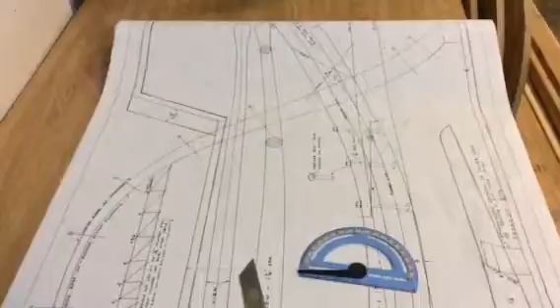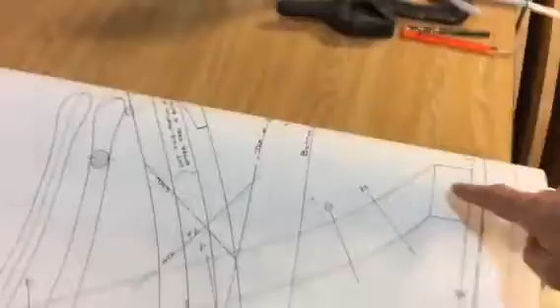Tonight I am working on trying to do this bevel on the transom. This page is very confusing because it's got several different things on it, but this big swooping line that's kind of going diagonally across the paper there, where we can see this A, B, C, D, E, F, G, H, and that's finally I up here. These are the bevels for the edge of the transom.

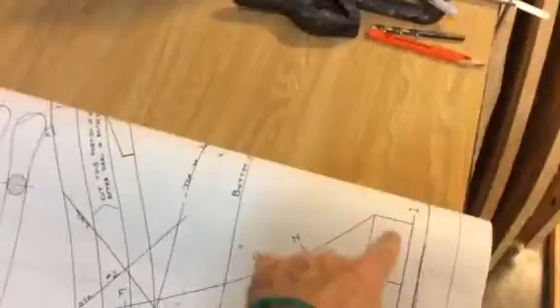This part up here is where the keel mates up with the stern knee, which is laying in those two frames right there. The end of the transom, that pointy part of the transom, comes right up to here, and then the keel comes and fits down onto here. As a result, you got to have a pretty good bevel at this part of the transom. So that's listed as I.

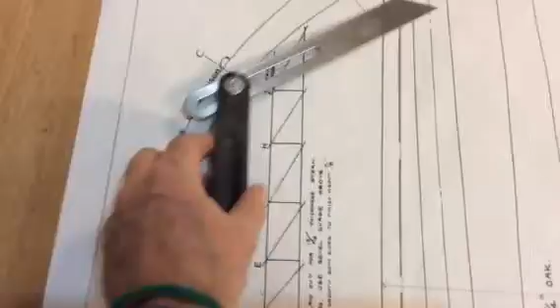It's hard to see there. I couldn't figure out for a long time, but that's I. And then there's corresponding bevels on this little chart over here. So you can see there A, B, C, D, E, F, G, H, I. And so what I've been doing, I've taken my bevel tool and laying it up there. Now you can see that's not on I, but we're going to try to bend that up just a little bit and see if we can get that.

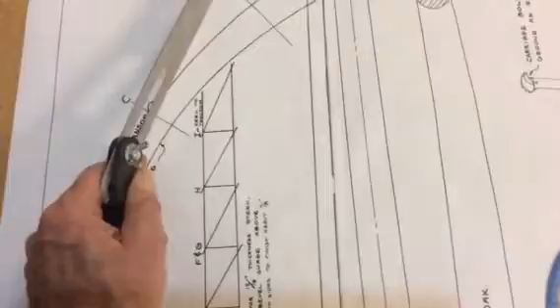Still not enough. Okay, that's closer. Now you can see that we're pretty close to that angle. It's even just a little bit more than that. That might be too much. Yeah, that's pretty much right on it. And so what that means then is you got to come over to the transom here, which I've got clamped down on a couple of sawhorses. See, and I've been using the spoke shave there.

And you can take this bevel and lay this on the end of the transom there, and you can see that we're pretty close, maybe off just a teeny bit right there, but it's close. And I think if I can just take off this little bevel right there, I should be able to get that. So anyway, then it comes H, G, F, E, all the way back down to A, clear up here at the shear line.

When the planking comes around, it'll come around these frames. You can see up there on 16 where it's marked. The shear line's here. That's the last plank, and it comes all the way back. Those other frames aren't loaded in there, but you can see those lines drawn there right above 22. Well, that notch here, that's the shear line. That's where that last plank goes.

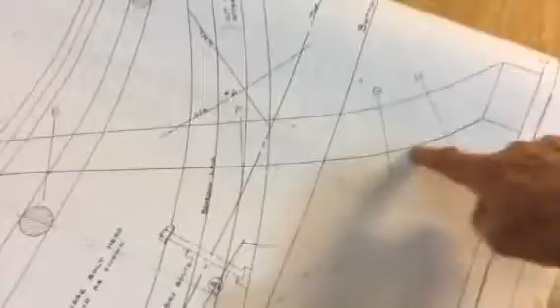The other thing I did is that I had this plan, and it shows these lines marked on here, what should be the inside face and the outside face. So in other words, here is the inside face, and that's the outside face. The very back of the boat is here. This will be facing toward the inside of the boat. So the idea is that planking's got to come around there, just like it's beveled up on these, to come back around and lay fair on that transom.

So I had this line on this template here, and what I did is I took carbon paper and I just made my lines right on the transom there, tracing over the lines that were on this template. I haven't done that side yet, obviously, but this side, you could still just barely see where my carbon paper line was. And so I've just been trying to come off to an angle, smooth to the edge of what is going to be the inside of the boat.

And you can just barely see that line drawn on. See right there? So as I come up here, I've got to cut off quite a little bit more as I come on up to where the shear line is.

All right. That went longer than I thought it would.